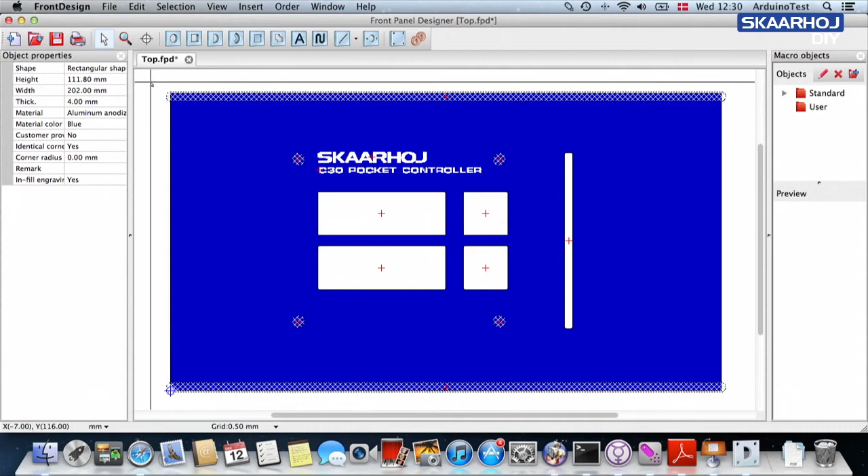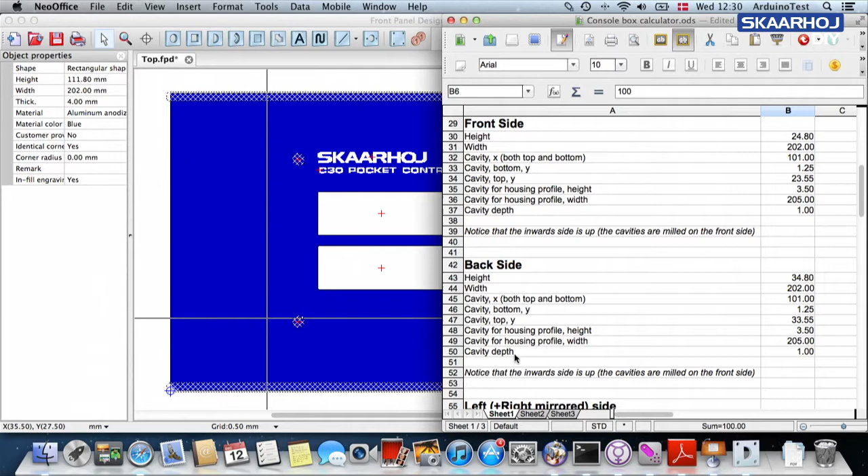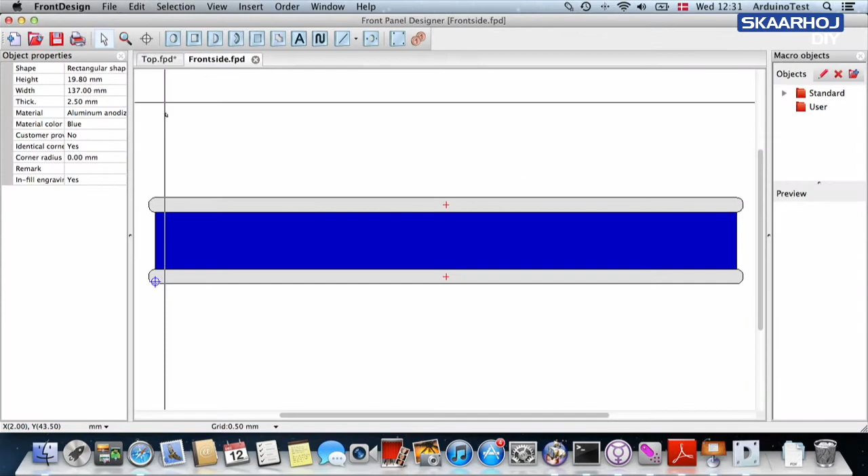And where we left off in part 1 is that we had this front plate created based on numbers that would give us an enclosure with a visible area which is 200 millimeters wide and 100 millimeters high. Now, if you scroll down in this spreadsheet, we see that we have similar numbers for the front side and for the back side. And if we look at the files from the enclosure folder that we downloaded from GitHub, we could open the front side. And you see this plate for the front side, and similarly for the back side it will look like this.

And in those two cases we don't have any other components than just the cavities for making them fit into the housing profiles. This is called a housing profile. We have 4 of those, here, here, and here. And the front and the back needs to fit into those. This is why we have the cavities, just like the top plate. So there's not much more to say about that.

Now, interestingly, the bottom is a bit different, because to make this tilted console, we need to do a little bit of bending. And it could be helpful to draw a little bit for you how this is supposed to work. Okay, so basically we had the top plate looking more or less like this with the cavities, and then the back side looks like this, the front side looks like this, and then for each of these we have the housing profile.

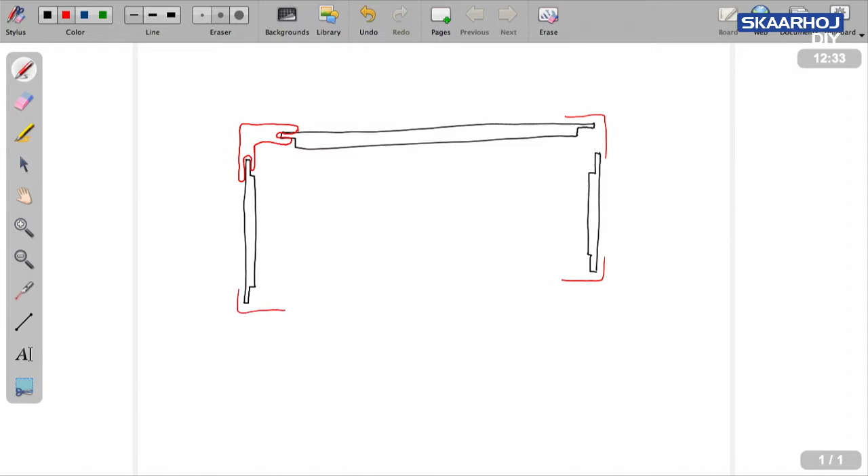The housing profile was 16 millimeters in each direction here, and it goes more or less like this, a piece of aluminum that will grab around here like that. Okay, and then we have the same over here, the same here, and the same here. So the reason why this becomes a slanted enclosure is that the green here is really a level table. So then everything is tilted a little bit. So how do we create the bottom part?

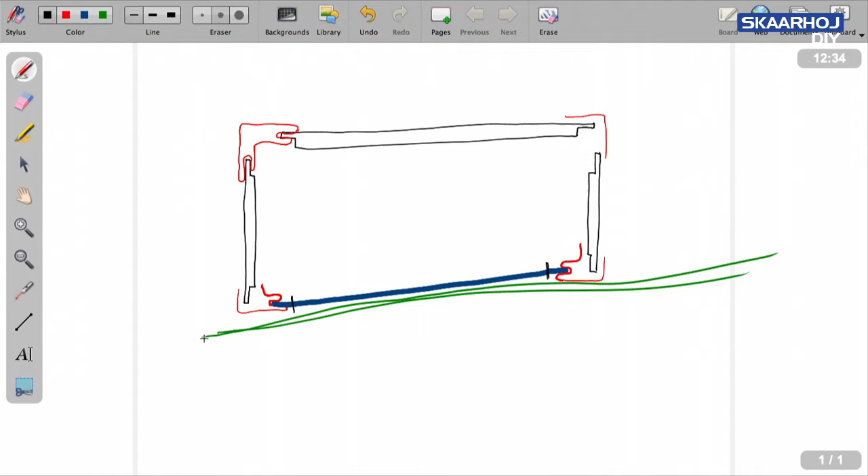And maybe we need to draw this a little bit more like it really is. Well, the bottom part is really made like this. It goes out a little bit, and then it makes a bend, goes in a straight line down here, and then it bends a little bit here. So there are 2 places where we have a bend, depending on what the angle of the whole thing actually is. And this angle is calculated from the spreadsheet, based on the height of the front and the back sides.

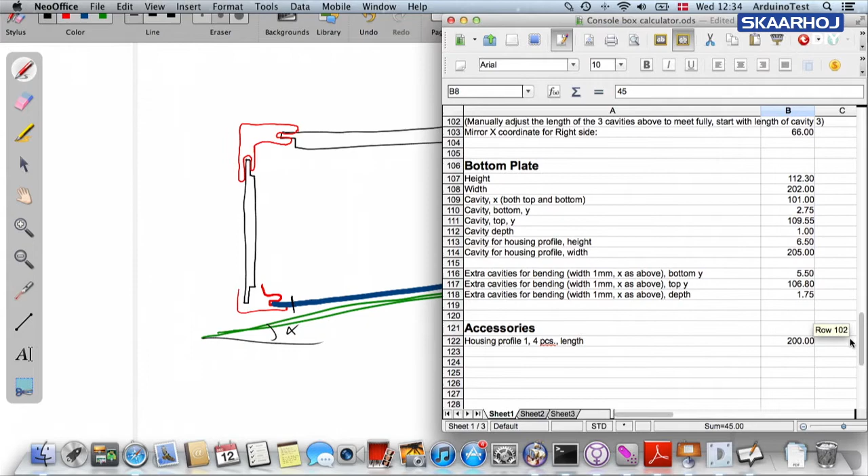But looking at what we need to do for the bottom plate, let's take a look at the bottom plate in the front design. We see that we have a cavity here, a cavity here, and then there's an extra little cavity right here. So there are two cavities to choose between, and if we choose the small one, the depth of this cavity is 1.75 millimeters in a plate which is 2.5 millimeters. So essentially we have 0.75 millimeters thickness of the material right there. The other cavity is only 1 millimeter deep, leaving 1.5 millimeters for the housing profiles.

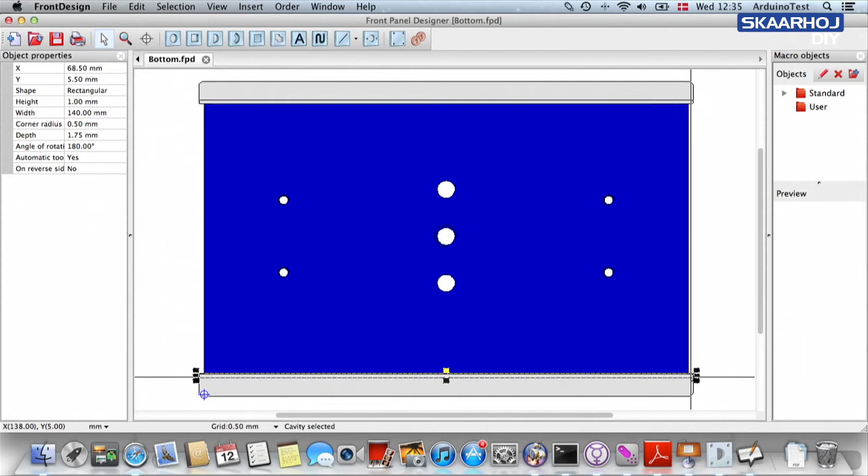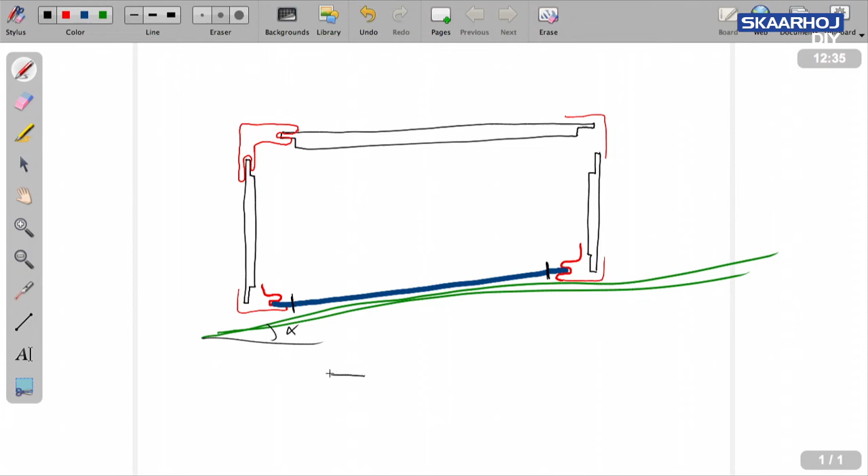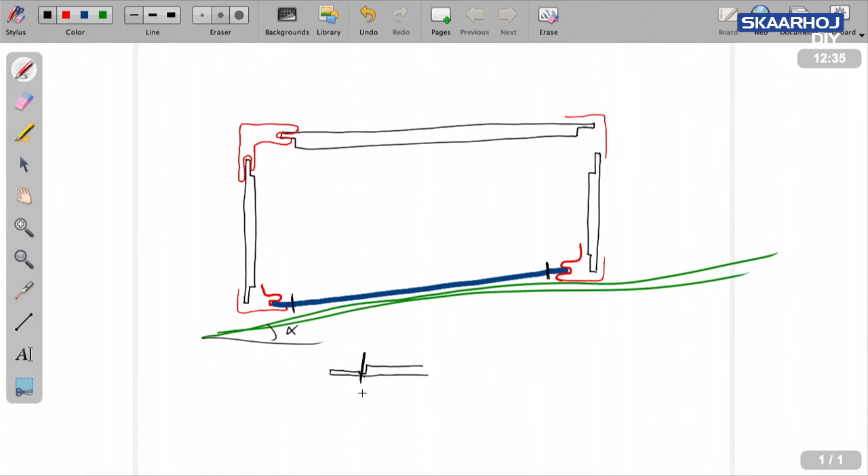So the small cavity serves the purpose of being our folding edge, and this allows us to fold those parts to make this bend. The plate looks basically like this when it comes from the factory. And then it goes down a little bit, and then it goes up to the full width of the front panel. So we can make the bend right there using a little bit of tools, but not much else. This is what you're going to do on a tool bench in a workshop. When you get this plate back from the factory, you need to bend those edges to match the angle that is required for the whole thing to fit together.